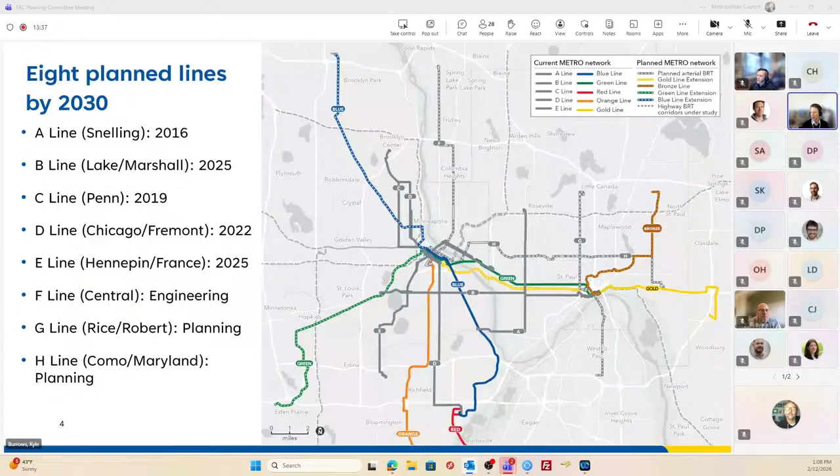For some context, many folks are aware of this, but we have 8 planned arterial BRT lines to be implemented prior to 2030. The A line through the E line are in operation today, as of December. The F line, G line, and H line are in various stages of engineering and planning.

The key task for our work here was to identify the next 3 lines to be implemented between the 2030 and 2035 horizon, and we're preparing to submit the J line to the 2026 regional solicitation process.

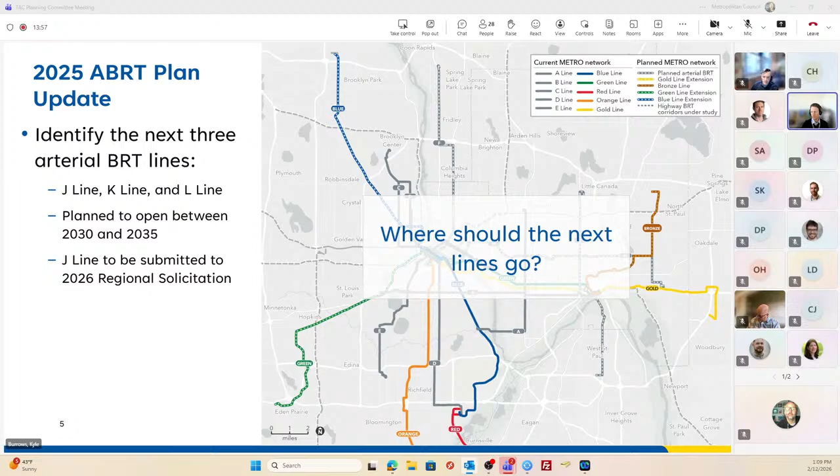To get to that point, we've taken a 4-step process throughout this past year, throughout 2025, similar to what we did the first time in the Network Next process in 2020 and 2021, where we started by identifying a large set of candidate corridors to consider.

These are drawn from high frequency routes, transportation policy plan guidance, and similar sources, then narrowed down to a smaller set of the most promising corridors using simpler screening criteria to help us focus on which corridors we really need to dig into in more detail.

Having developed those corridors in more detail, we performed a more technical, detailed evaluation using technical scoring criteria, and then ranked those corridors based on that technical score.

That technical score and screening criteria are really important ways for us to indicate where the most promising corridors are, on paper, for arterial BRT. But that's not really the only factor.

The other critical factors are applied in the prioritization step, where we take those ranked corridors and assess them on readiness, like how well they fit within the network, along with some other criteria about roadway, and from there ultimately select the J line, K line, and L line.

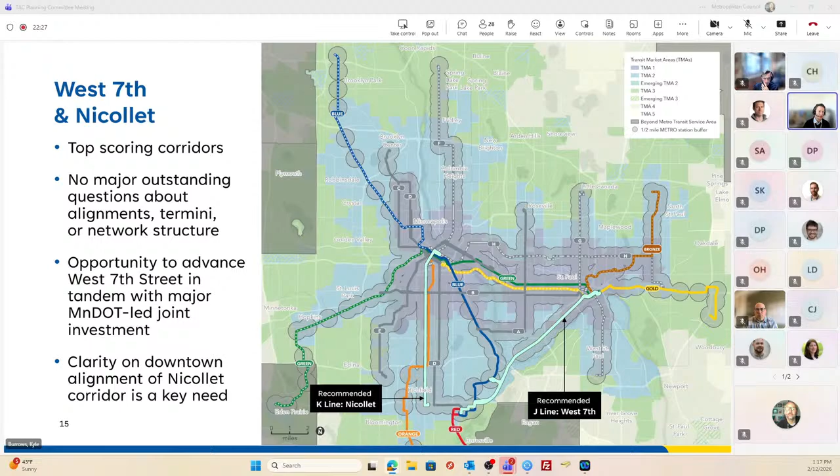Nicollet and West 7th Street are two of the top three highest scoring candidate corridors, with really no major outstanding questions about alignment, termini, or fit within the overall network. We see a lot of opportunity here, and we've been working with MnDOT, St. Paul, Ramsey County, and others on advancing this work in tandem with the West 7th Street project, which is MnDOT-led on that portion of the roadway. We do want to acknowledge there's a little bit of clarity still needed on the alignment of Nicollet Avenue in downtown Minneapolis, and we're working directly with the City of Minneapolis on that.

Circling down to the corridors that are proposed not to advance for arterial BRT right now, we'll go through these at a high level, talking through the rationale for each.

The Payne Westminster corridor has moderate technical evaluation results, but it's based on a significant planned restructuring of the local Route 64, identified through Network Now and set to take place in the next couple years. Since there's no current route with this alignment, there's untested potential performance for arterial BRT. The recommendation is to implement the planned changes shown in Network Now and continue to monitor service here for future consideration.

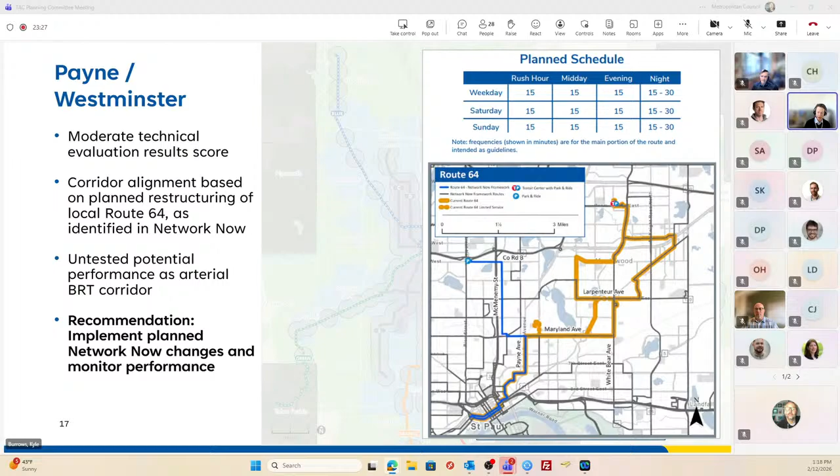Moving to Bloomington Avenue and Lyndale Avenue North, this is a good scoring corridor in the top middle of the pack. The Lyndale Avenue segment is very close to the D line, within about a third of a mile, which is less complementary and more competing for riders and access. So we're looking at not advancing arterial BRT on the Lyndale Avenue North portion. On the south side, the Bloomington Avenue portion is a good candidate for a potential C line extension along with Cedar Avenue, and we're bringing both corridors into that work, which we'll complete throughout the rest of this year.

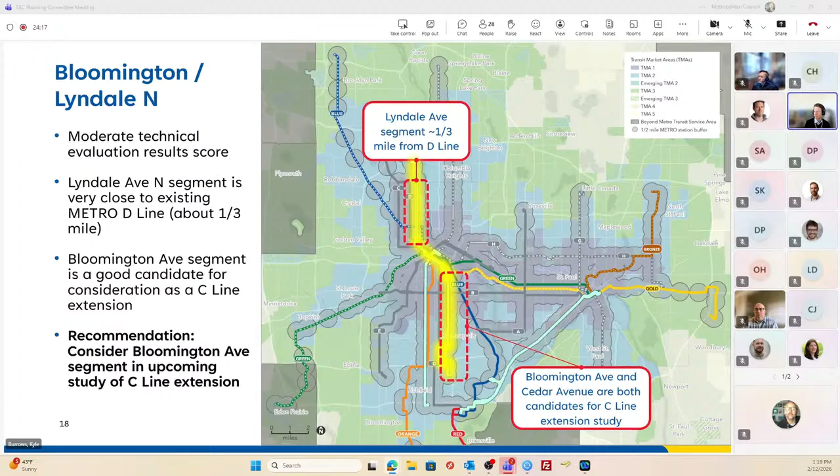63rd Avenue and Zane, working our way down the technical evaluation results. This corridor is very short, which is one of the challenges, since the speed and reliability benefits from limited stop spacing have trouble standing out on a corridor this short. That said, this challenge could be mitigated by attaching this portion to an existing corridor, so we want to look at this for a potential extension of the C line on the north end, which may help mitigate some of those concerns.

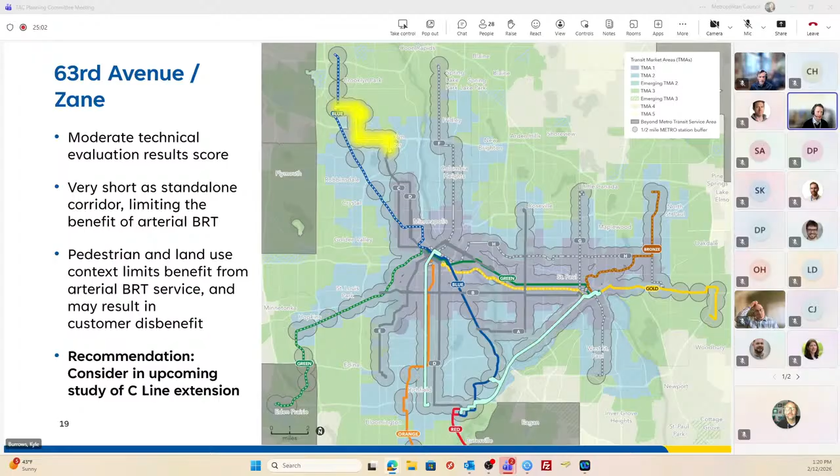Getting towards the bottom of the technical evaluation results, the Broadway Avenue corridor has a couple of challenges. One is the pretty low forecast ridership and productivity, passengers per in-service hour. The other major question is about the alignment and terminal locations. This corridor is based on an existing Route 30, which serves a particular purpose as a crosstown route on Broadway and provides access in the mid-city industrial area near the Quarry Shopping Center, where it gets really squiggly.

That's important access, but it's not really how we try to design arterial BRT corridors, where more turning movements mean slower speeds and you start to lose the speed, reliability, and simplicity benefits. There are real challenges in this corridor about how to approach it, so the recommendation at this point is to consider the problem and explore potential local route adjustments before doing anything with arterial BRT here.

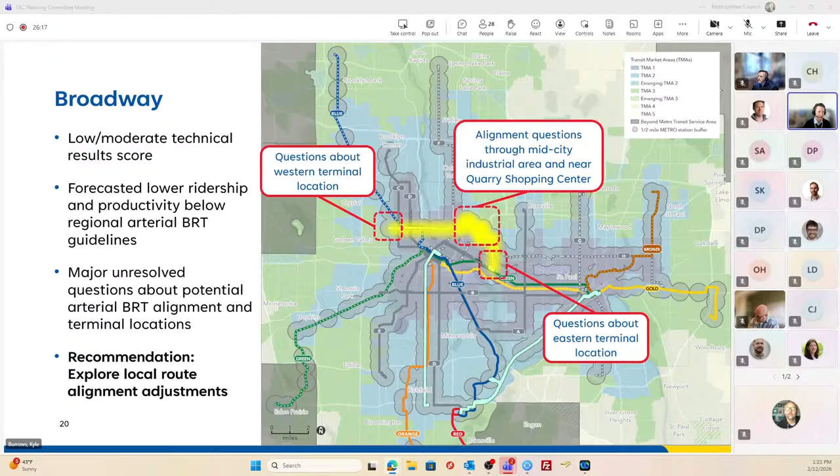The 66th Street corridor, served by Route 515, is another corridor that's relatively short, which limits the benefit for arterial BRT. Ridership and productivity here are also forecast to be relatively low compared to other corridors, below what we'd want for arterial BRT. The recommendation is to continue monitoring service and develop local service on Route 515, which was recently restored to a high frequency level of service.

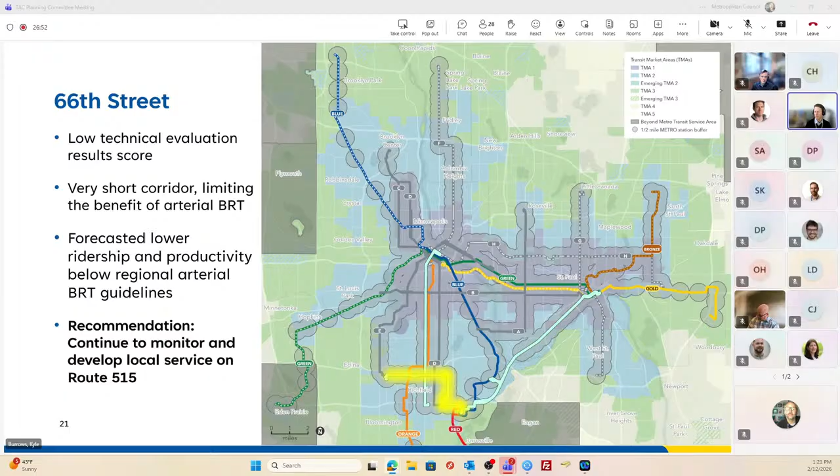Finally, bringing us back to the candidates remaining to consider for the L line, which we have not yet identified in this work. So we have 3 corridors here: additional study needed on the Franklin Grand 3rd Street corridor, which I'll talk a little bit about, and then the Johnson-Lyndale corridor and the Randolph East 7th Street corridor, which are still under consideration.

So looking at the Franklin Grand 3rd Street corridor. This corridor scored very highly in our technical evaluation results. It was among the top 3, and it's a really good corridor on paper, on the map, in terms of those evaluation criteria. There are some pretty significant unresolved questions right now that we need to resolve before we would be confident in naming this corridor for arterial BRT.

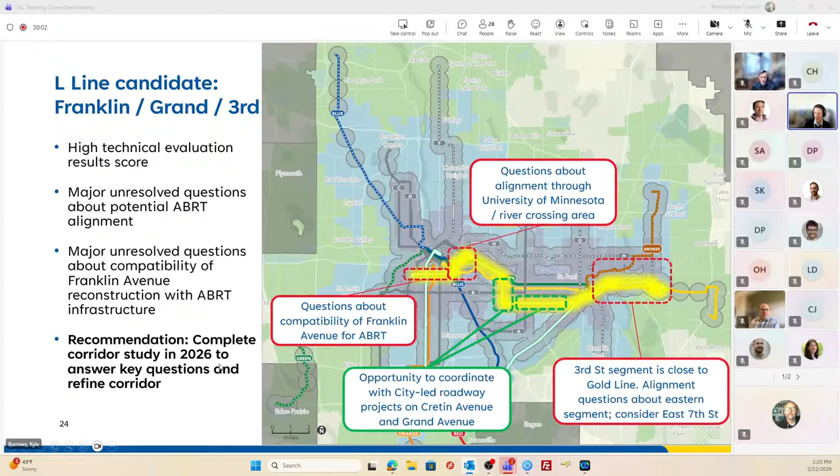Finally, another L line candidate is the Johnson-Lyndale corridor. Here we're back up in the upper middle of the evaluation results. The real challenge with this corridor is how close it is to other existing and planned metro lines. It's within a half mile - it is exactly a half mile from both.

The planned F line on Central Avenue and on Johnson, and then on the south side between the E line and the upcoming K line on Nicollet Avenue. So that's not a reason to say there should never be arterial BRT in this corridor, but it is a reason for us to ask, is this the right next investment given the level of service that's already in this area?

And finally, the other remaining L line candidate is the Randolph East 7th Street corridor. This is lower on the technical evaluation results. The other significant drawback here, or consideration, is the overlap between this corridor and the West 7th Street corridor and those associated roadway projects.

So it's a similar question of whether this is really the right next corridor to be investing in - not that we should never do it, but is this the right next one? And there's obviously some tie-in on 7th Street between the upcoming corridor study and the definition of this corridor as well.

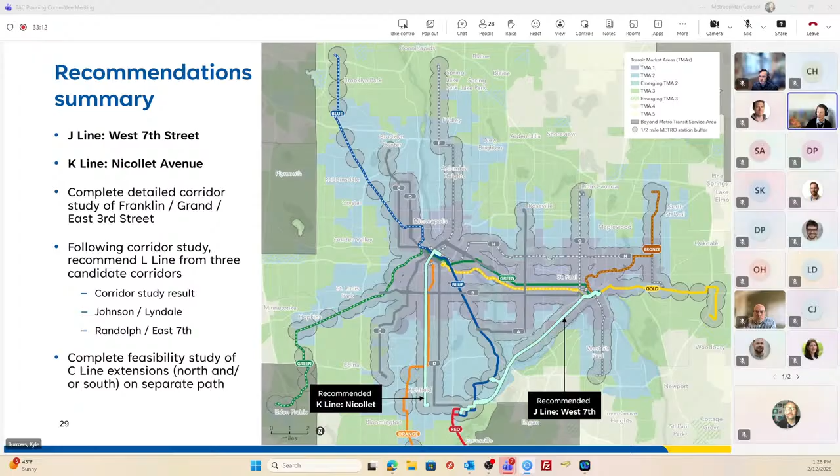We intend to complete that additional corridor study of the Franklin Grand 3rd Street corridor this year. Following the completion of that study, we'd be recommending an L line corridor from either that corridor study result, the Johnson-Lyndale corridor, or the Randolph East 7th Street corridor. On a separate path, we're looking at completing the feasibility study for C-line extensions on both the south end of the corridor and the north end of the corridor.

Upcoming work from us in terms of milestones here. So later this month and into March, we'll be bringing a business item forward to the council, recommending the J line and K line for council adoption. I will be at TAB next week, giving an abbreviated summary of these outcomes here.

And then we'll be bringing forward the J line for the 2026 regional solicitation process and initiating TPP amendments to include the J line and K line, and then continuing that additional corridor study work. And with that, Chair, I will stand for questions.

Thanks, Kyle. Good presentation. I like all the maps for sure. That's what keeps my interest.

Committee, are there any questions for Kyle? We got Kevin. Yes, thank you, Mr. Chair. Kyle, just a question about the technical scoring criteria.

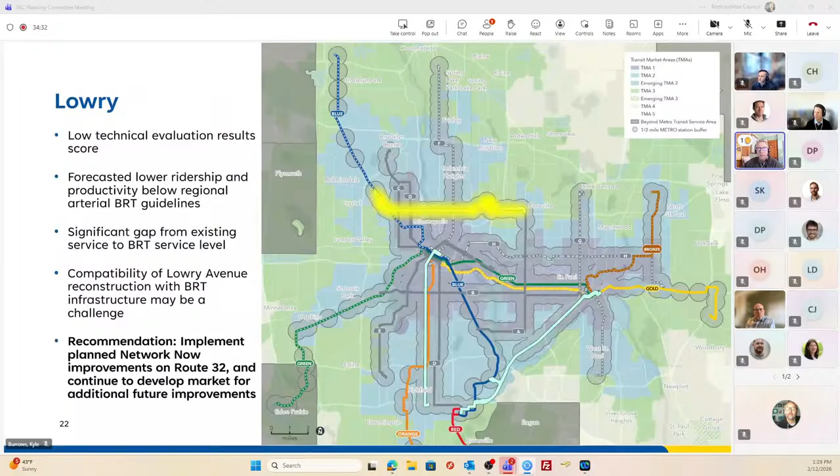One of them was cost to provide the service. Just a clarification, that's not a capital cost to build the project, is it? That's a capital cost estimated, or not, that's a cost estimated to operate the service, is that correct?

Chair, committee members, it is that overall score incorporates both of those things. So there's a capital cost element to it, as well as a kind of an annualized operating cost. Okay, thank you very much.

Any other questions? I have one or two, just out of curiosity. Not challenging anything that you're recommending here, but why is there no I line? Is that like the 13th floor of a hotel? You just don't do that?

Chair, it's a good question. It's about kind of like readability and kind of potential confusion for the number 1. Okay. Cool.

I don't know this. I just assume this is the case, but a BRT line, does that stop less than a normal bus line? It's like supposed to go further distance quicker and it has less stops. Is that true? Chair, that's correct.

That's kind of the fundamental, or one of the fundamental pieces. So arterial BRT overall, maybe I should have started with a little bit of a summary of that, is sort of a more limited stop service where we have high frequency service, limited stop spacing, kind of more investment at stations rather than sort of bus stops. So every station has a shelter, a pylon with real-time arrival time information, light and heat. So it's a little bit more of a comfortable waiting environment there as well.

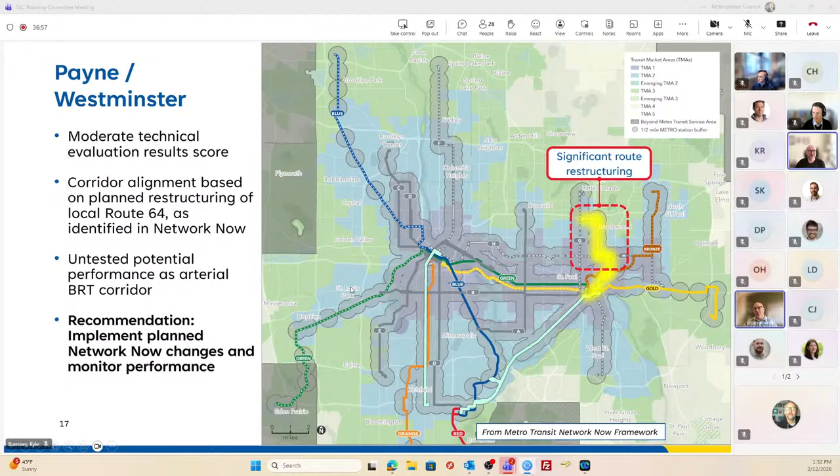Chair, it's a great question, and yes. So we've kind of looked at a variety of corridors that have a different kind of, I would say, a variety of purposes within the overall network. So yeah, hub and spoke, they tend to, those kind of real core routes that are leading into town tend to have that higher ridership. But we also want to be making sure that we are providing those crosstown services.

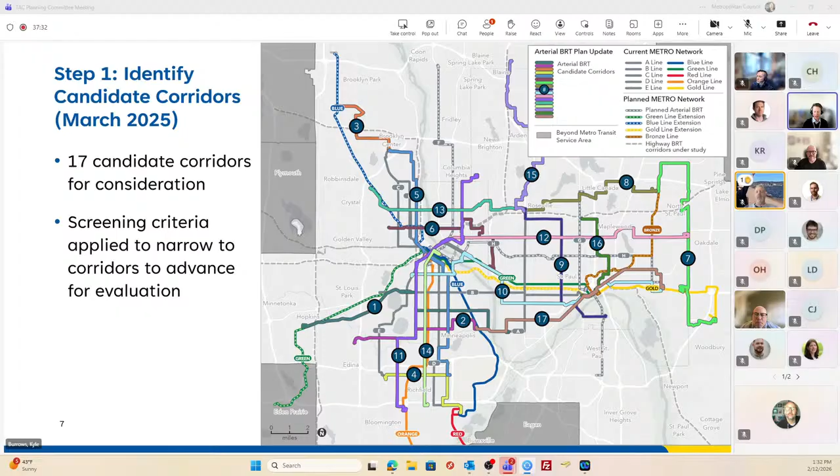And I think one of the things that, let me just move us to actually sort of our, let's do a good, is that it's not each of these individual routes, while many of them do serve downtown, many of them also serve sort of a multi-purpose that includes kind of a crosstown purpose. So if you take a look at, for example, the Metro H line, right? So yes, that does serve downtown Minneapolis, but it really provides kind of that crosstown function here as well as part of that corridor.

I'm representing Carver County, but I live in South Minneapolis, so I'm a big B Line fan. Right, yeah, B Line does a similar thing. Yeah, I'm also a B Line user.

I think it depends on the corridor, and you alluded to this earlier. These are the arterial BRT services, not like the highway BRT study the council looked at in the past, where it would operate more on grade-separated or access-controlled highways. Cool, yeah, I appreciate it, and thank you again. It seems like you all put a lot of good hard work into it.

Patrick, you're up. Thanks, Kyle, it was great. I had to step away for a couple minutes, so I apologize if I missed this in your general remarks.

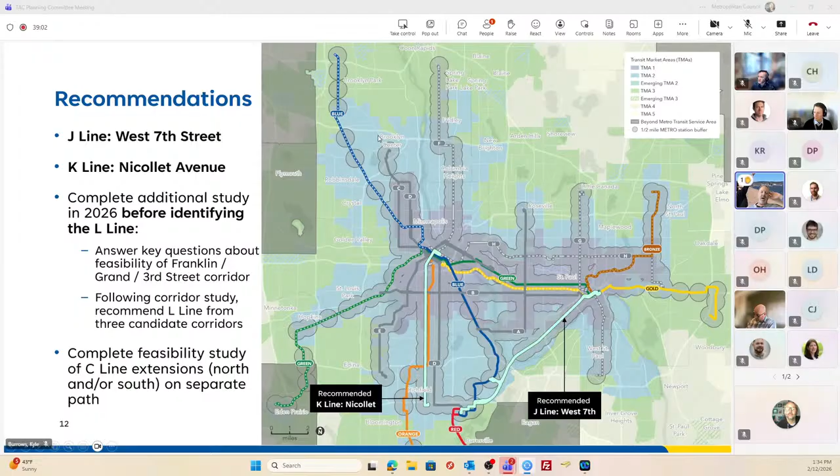Chair, committee members, another good question. So the basic structure of arterial BRT lines is to not have branches or short lines. Any bus you get on going eastbound is all going to go to the same location, which helps with simplification and helps you avoid getting on the wrong bus. However, that doesn't mean we wouldn't ever run two corridors, like a J line and an L line, on the same portion of roadway for a time. So there could be overlapping where the J line and L line both operate, and if we were to advance this as the L line, the L line and the J line would overlap a bit on West 7th, but they would still be thought of as separate lines.

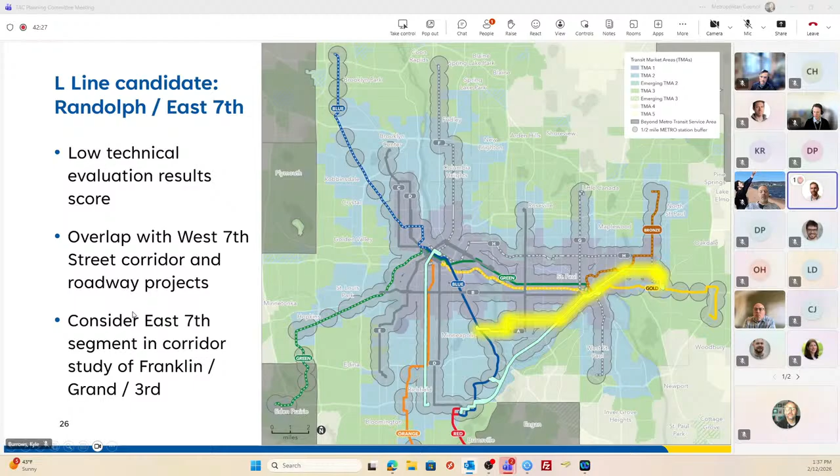Sure, okay, looks like we have another question from Cole. Yeah, Chair, sorry, I'm not a committee member, but I wanted to see, Kyle, if you could go back to the evaluation framework. First I want to acknowledge this was put in place prior to the 2050 plan being adopted, because the study started before that was fully bundled. Can you talk about how some of these important metrics relate to the TPP goals and objectives, like the regional plan objectives, and maybe that gets at what Charlie was asking - how do we say these are contributing to what the region's trying to achieve overall in transportation?

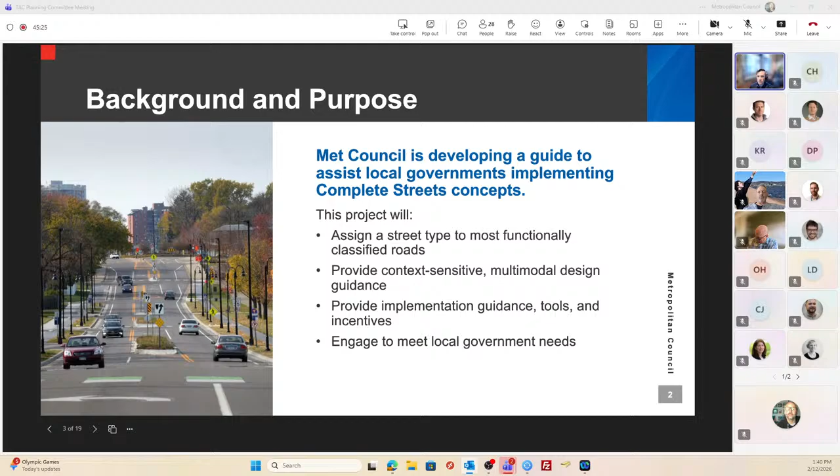This study will assign a street type to most functionally classified roads, provide context-sensitive multimodal design guidance paired with those types, provide implementation guidance, tools, and incentives through regional funding programs, and engage through the process of its development to meet those local needs.

There are a few different reasons this project is finding its way into our work program. First, it's specifically identified in the 2050 Transportation Policy Plan. Policy 23 concerns complete streets, and specifically Action 23D calls for creating the street typology and related technical assistance. There are upwards of 20 actions in the Transportation Policy Plan that this has either direct or loose connections to that we'll also be addressing in the course of this project.

We're also addressing provisions that provide greater design flexibility in federal aid projects, starting with the FAST Act and further widened in the Infrastructure Investment and Jobs Act. There's more flexibility that local governments have when using federal funds on roadway projects. We'll provide some light touch guidance on how to use this flexibility, particularly in how to adapt roadway design in different land use contexts, or using roadway design as a tool to guide a future vision for the built form in an area. We'll build upon some existing tools that the Federal Highway Administration and MnDOT provide and include some lessons learned from other peers.

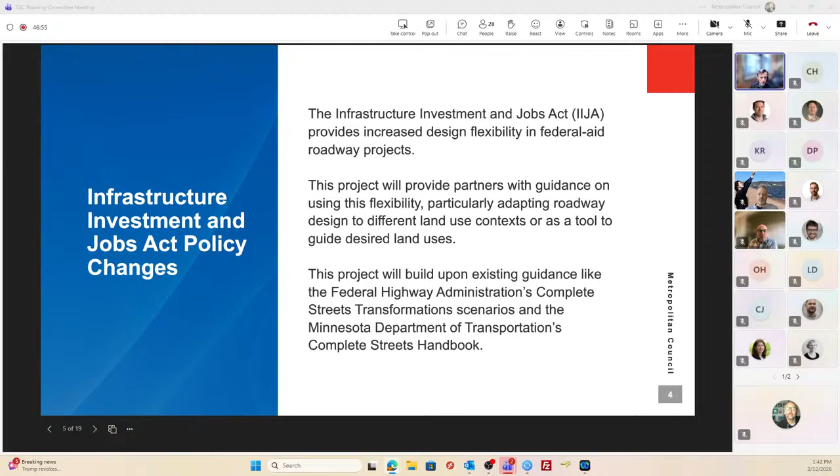Beginning with the 2026 Regional Solicitation and Active Transportation Solicitation, those programs will include scoring criteria that are either named complete streets or closely related to complete streets. In some of the categories, this is a substantial amount of points, up to 40% in some. During the course of this study, an application cycle will be completed, giving us an opportunity to reflect on those measures and what we've learned from this study, and consider any refinements that might be needed to the measures or the scoring guidance.

As written, the 2026 draft application measure is qualitative and focused on safety and connectivity for people walking, biking, rolling, and taking transit. It doesn't include differential guidance based off of land use context, and it leaves it somewhat open to score discretion. This is an opportunity to both refine some of that guidance to make clear that what a complete street is varies by community context, as well as to incorporate a broader set of considerations. The umbrella of complete streets is not just about safety and connectivity—it also includes concepts like how humans interact with the surrounding natural and built environment.

Also on the topic of regional programming, these criteria are also responsive to statutory requirements to consider complete streets policies and practices when using funding from the regional active transportation portion of the sales and use tax. So this study presents an opportunity to check what we've developed and ensure we're meeting statutory intent, as well as to provide technical assistance so more communities can score well against this criteria when applying for this new source of funding.

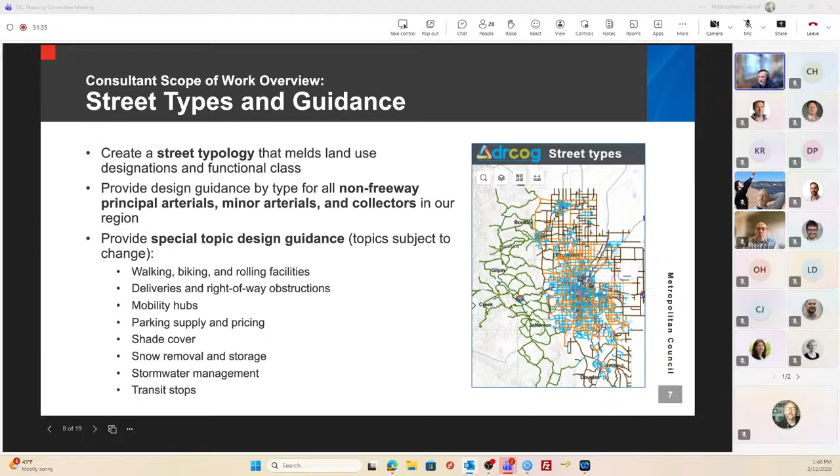We acknowledge this project is not really the first of its kind, not even within our region. We seek to apply insights and build on existing guidance. Locally, the Minnesota Department of Transportation has its Complete Streets Handbook that is mostly concerned with the state system. The city of Minneapolis has a street design guide with similar street types specific to their jurisdiction. And we've reviewed a number of examples throughout the region and throughout the country at both the regional and local levels.

As mentioned previously, this project will include those recommended actions for programming processes and will include space in the scope for engagement on how communities feel this should influence the regional solicitation, and how we can reflect upon what we've experienced in this upcoming 2026 solicitation.

A significant portion of this project is engagement to meet those local needs. We'll include a technical advisory group with city, county, and other agency partners that meet likely every 6 to 8 weeks throughout the project to provide strategic guidance and technical review of deliverables.

In all of these settings, our key audiences are not just public works, although that's the primary one. It would also include land use, community development planning, and parks departments.

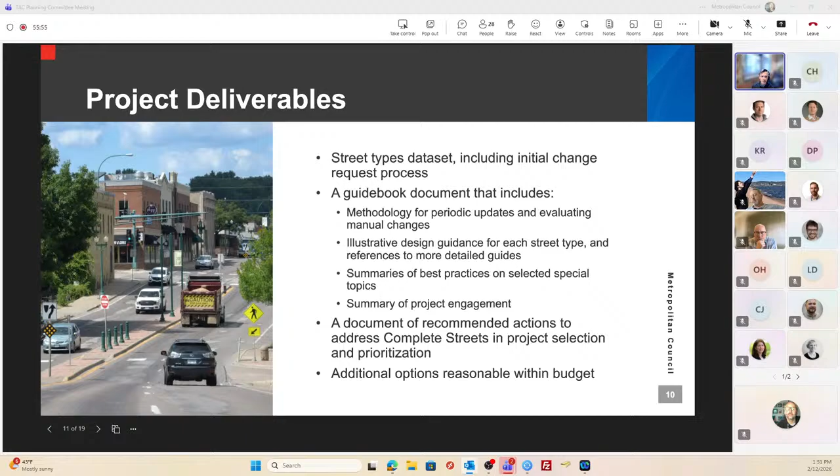So the next four or five slides provide examples of project deliverables from a similar MPO level example. We have reviewed some other examples, and this is not the exclusive basis of this project, but this is the most complete example that I wanted to draw some slides from.

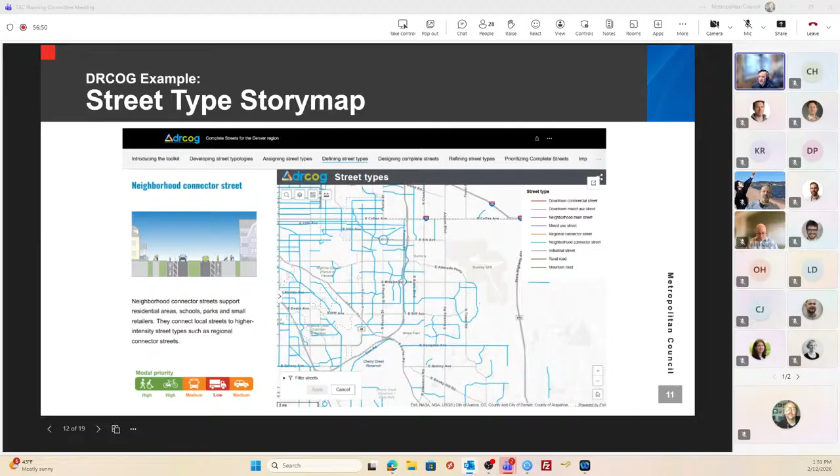So this is a screenshot of their interactive story map application that shows the assignment of their street types and a brief pop-up description of what that type might look like. Here they describe their neighborhood connector streets, which are more for those urban neighborhoods, first-ring suburban neighborhoods where the roadway is probably connecting a residential area to small commercial nodes or schools. In these areas, those pedestrian and bicycle elements may rank a bit higher.

Here's an example of their guidance for that type in their guidebook itself. It provides this illustration of what a street like this could be, an investment priority framework.

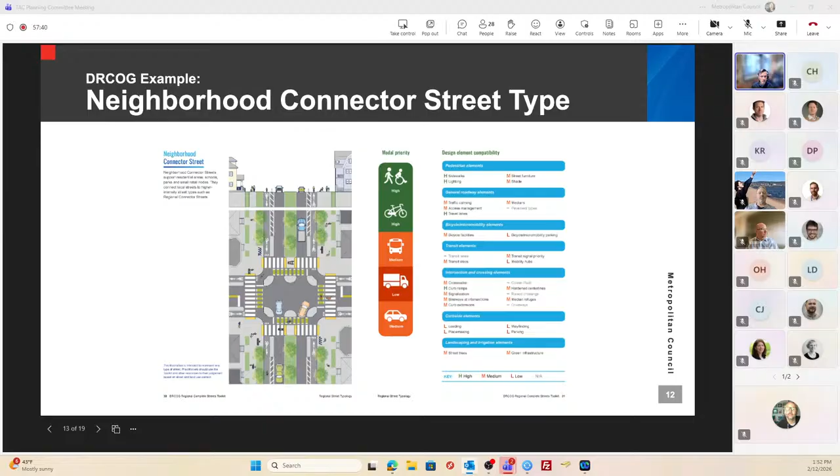One of the things we've noted in some early engagement on this project is that the messaging around how we describe different modal treatments in these street types is important, so as not to imply that any user is a low priority, but it's more so what is the investment need and intensity in these types. And then they also provide a list of common elements that you might expect to see in these corridors and those elements that might not be appropriate for those corridors.

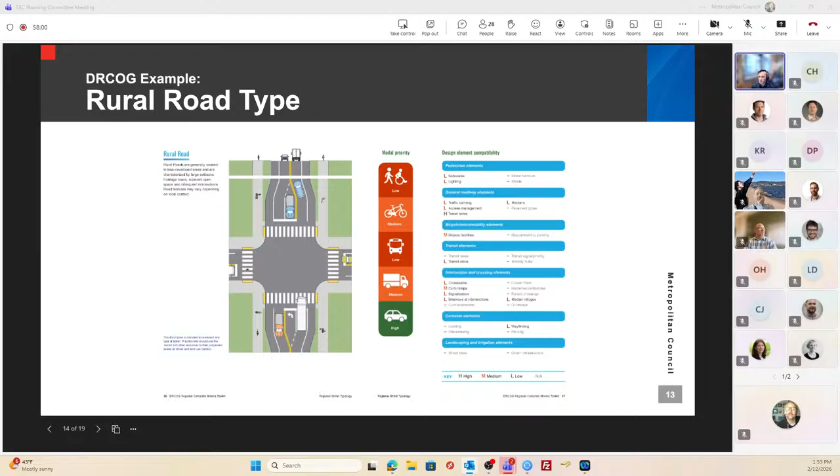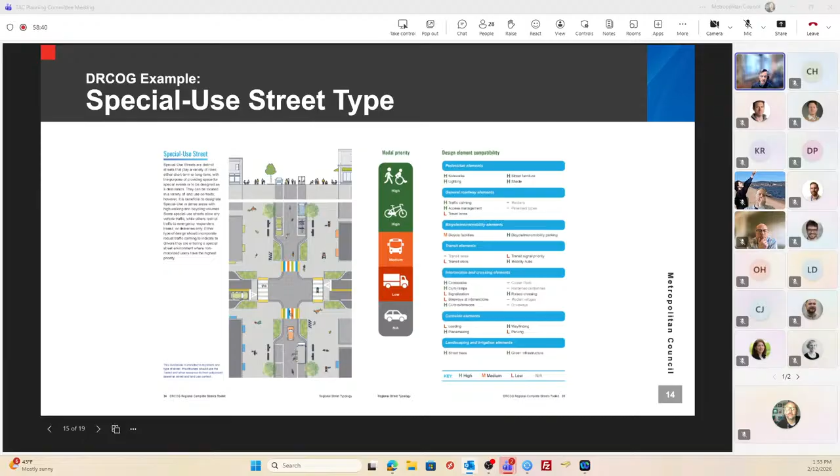The next slide shows an example of something we're not likely to include in our guide. The Denver guide provides a special use street type. Think of this as your pedestrian mall, like Nicollet Mall in Minneapolis. This is really a small segment of the entirety of our functional class system in the region, and it might not be as broadly applicable, so it might not be the most efficient use of resources for this project. These are still important features to have in our region, but it's not something that we'll likely cover in depth in this guide.

So this project is scheduled to support the 2028 regional solicitation cycle. We're planning to finalize the scope and release the RFP this quarter. It's currently identified for $350,000 in the UPWP, though we're considering adding some additional funding in 2028 to support more local government engagement throughout the project and sequence some of the more final documents towards the end to accommodate that.

In Q2, we hope to select the contractor, award the contract, and initiate the project, with the bulk of the work starting in Q3 of 2026 and extending through the end of 2027. This is the timeframe that the project's technical advisory group would meet while the main project deliverables are created. So while most of the project would be completed by the end of 2027, there would be some ongoing tasks into 2028 to implement the recommended adjustments to the regional solicitation and to facilitate local government usage of the guide.